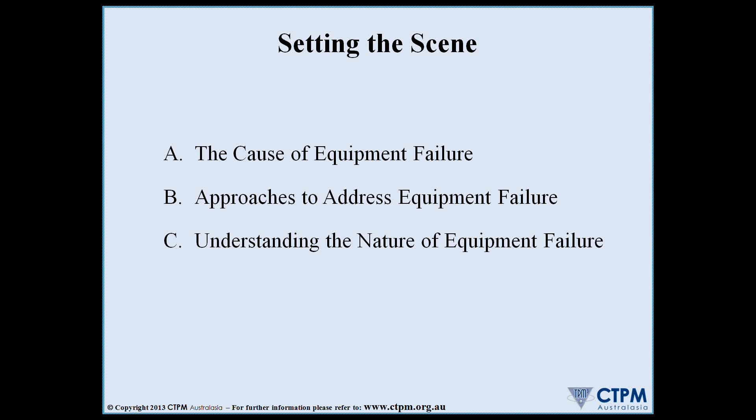Now to set the scene, I thought I'd just talk about three brief topics about equipment failure: the cause of equipment failure, approaches to address equipment failure, and understanding the nature of equipment failure. Because if we don't understand equipment failure, it is very hard for us to really get our head around how do we get our equipment to run perfectly.

So the first one is the causes of equipment failure. We've created this slide to help people understand that when something fails, and we're talking about your machinery in the plant, which often entails a lot of mechanical type componentry, often equipment doesn't just stop. There's often some signs beforehand.

We often see in plants where there is poor performance. In other words, the equipment is not running at the correct speed, or the equipment is not producing the product to the right tolerance. Now often before that starts to happen, there'll be further signs. Things like getting vibration in the equipment, noise, heat or fumes.

For example, we might put a pump into our plant. We expect the pump to run for, say, 5 years. After 2 years, the seals might start leaking and the pump may not be performing to requirements. Now, that's an example of early or accelerated deterioration. And then the next question we ask is, why does early and accelerated deterioration occur?

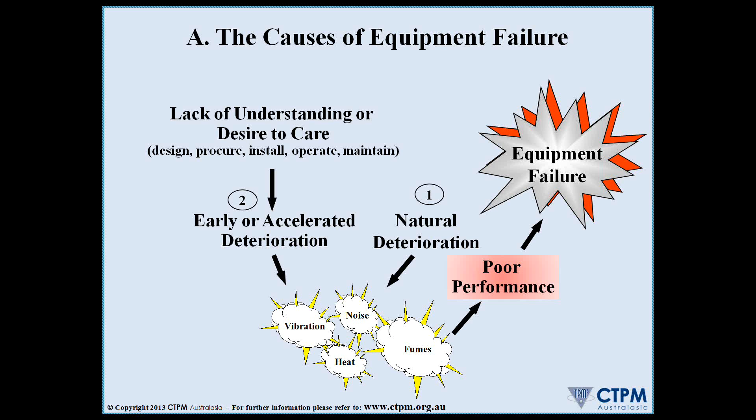Now, we have a slight challenge on my hands. Sorry about that, the screen decided to freeze up. Okay, let's move on to the next slide.

If we don't do anything about it, the contaminant could get into the bearing. It could be a damaged grease line, where if we don't do something about it, grease will stop moving into our bearing and the bearing could go into accelerated deterioration. It could be nuts and bolts coming loose. So that's the indicator.

So if we expand our slide and look at how we approach equipment failures, the first one is reactive. People go out there when it fails, get out there very quickly, do a great job, and get it all fixed up. That could be when the equipment breaks down, or when the equipment starts performing poorly.

The other approach is called predictive maintenance. This is where we go out and use preventive and predictive techniques, inspections. We inspect the equipment, and if we see it's worn or running hot, for example, we'll organise to replace it before it fails. It could also involve a lot of condition monitoring. So it's trying to find the problem after the accelerated deterioration has occurred and then fixing it before we get to the poor performance area.

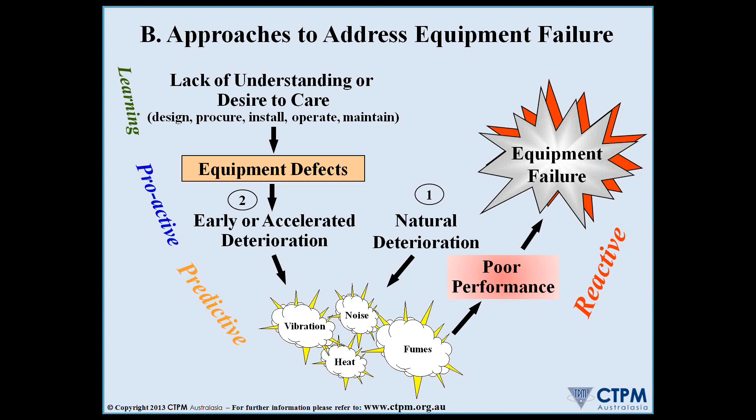So again, just a quick poll. What does your company do? What's your site do? What's their focus in relation to those four approaches? So at your site, what is the main approach to address equipment failures? Is it reactive, or do you put your energies into being predictive? Is your main focus proactive, going out there and getting, some people call it TPM, total productive maintenance, operators engaged to find all the defects?

Or you're trying to create a learning organisation where you're putting a lot of effort into the development of skills of your operators? Now, in most cases, people are doing all of those four things, but there's often a dominant one you can tell when you go into a site where most of the energy is going.

Our poll is progressing, and we are getting some interesting results coming up. Again, this just involves your best estimate of what you think is happening out there, and what we're trying to do is to give you some feedback as to where everyone is up to out there in the group. So the poll is getting close to being closed. And at the moment, yes, we've closed the poll.

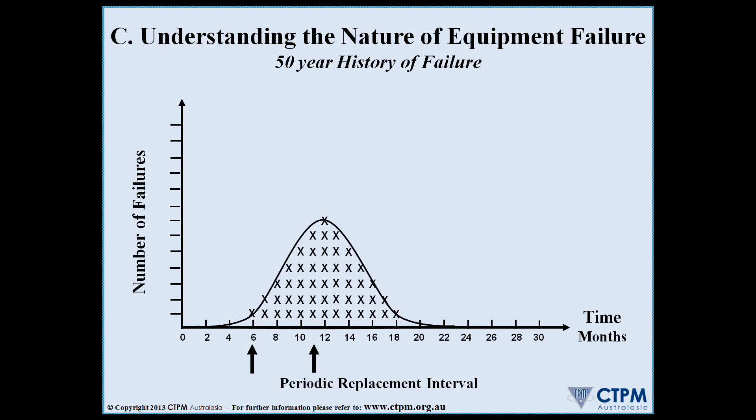And that was really the focus of these studies by DuPont and Alcoa, etc. How do we understand what's causing this variation? And I'm sure you could all come up with a great list of things that cause variation in component life at your site. What they discovered was that there's 3 dominant factors that made up about 80% of that time. And those 3 dominant factors were things coming loose, contamination getting into equipment, and lubrication not being perfect.

Now that frees up time for your maintenance resources, it stabilizes your plant, and what it also allows you to do is once you get past this, I guess, reactive stage of responding to all these things with their variation in component life, is to start looking at design weaknesses. Where are the weaknesses in our plant?

Again, use a car example. I remember an old car I had many years ago. We had a distributor with a set of points in it that would run spark up to the spark plugs to run the engine.

Now, what we found is the points used to wear quite often, and you'd have to re-file them, and that would put the timing out, so you'd have to continually adjust the timing on the car. Quite a heavy maintenance activity. This day and age, they've identified that design weakness and they've gone and replaced it with electronic ignition, so you now have a little black box that doesn't need any maintenance and it lasts for a hell of a long time before it needs replacement. So that's what we call design weaknesses.

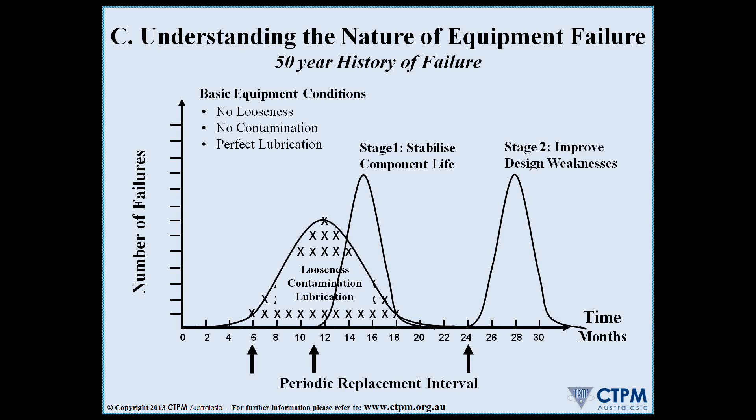So again, if we can develop their skills to understand the functioning of equipment, they can help identify these design weaknesses. And the end result is we substantially save money. And again, at least 50% reduction in our maintenance materials costs. So that's a bit of background. Let's get on to what we want to talk about.

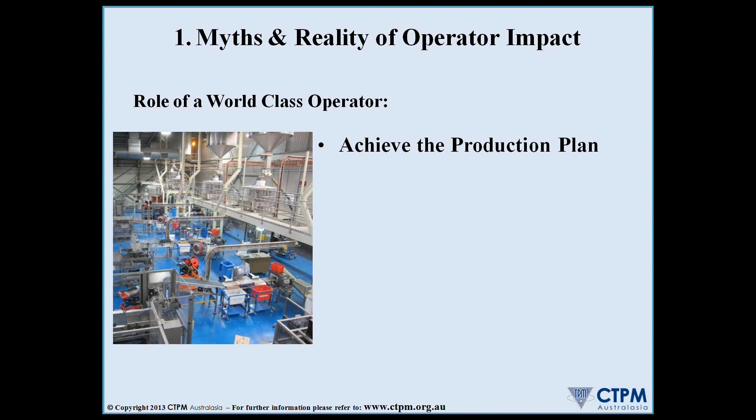Operator impact. Do operators have an impact on equipment performance? Well, let's look at the role of the operator. We want them to achieve the production plan, obviously. Now, in this day and age, obviously they have to be also very good at frontline safety and environment. They're the front line. If there's any hazards out there, we want them to respond straight away, whether it be a hazard to safety or a hazard to the environment. And in fact, most best practice companies now have their operators involved in checking on the behaviours of their colleagues to make sure that everyone's got good safety and environmental behaviours.

Frontline quality, we expect our operators in this day and age to pick up on quality problems at the earliest possible time. If we want perfect equipment and perfect performance out of our equipment, we need to make sure our quality is right. And that quality is not just what we make, but the materials we're using to make it, what we call zero defects accepted. Don't accept bad packaging material, don't accept bad raw material. Pick it up before we start processing it is very, very important. Obviously, processing it correctly is very important, and thirdly, making sure what we do finish up with is correct.

Energy management is becoming very, very important, so being able to pick up on any energy losses at the earliest point is a very important role. And then comes frontline equipment care. That's what we've been talking about. So you've got all these other things we want operators to do, but then we want them to take care of the equipment. And finally, formal ongoing improvement. We want them to be involved in improvement activities as well.

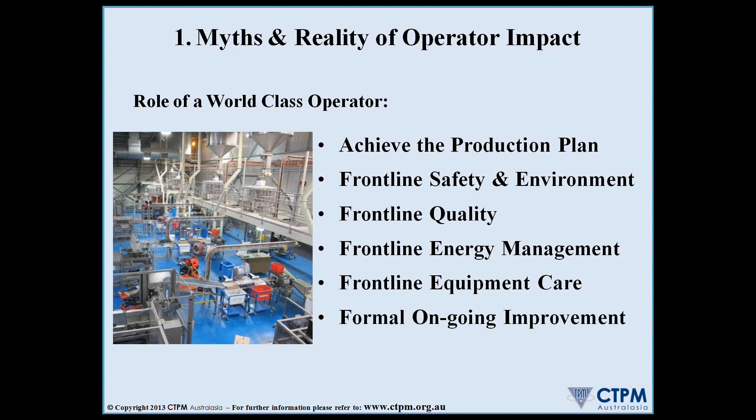So if our operators are capable of doing all that and we have trained and developed them, we have a hope of getting perfect equipment performance. If we don't develop our operators and just bring them in, give them a few standard operating procedures and tell them to go to it, I assure you your equipment will not perform very well and you'll have very high costs.

The other myth is maintenance. What about maintenance impact on all this? A lot of organisations you go to, they think, well, you operate, maintenance maintain, you operate, you fix, etc. We've found the whole thing is a very integrated activity these days if we want to get up to a learning and proactive environment. Obviously, the operators have to do the frontline equipment care. They're the ones out there with the equipment to find the defects at the earliest possible time. Maintenance still need to do their repairs, they need to do their preventive predictive maintenance, monitor the equipment, etc. And most importantly, the strategic maintenance, design out the problems and standardise.

By standardising, we mean we want to teach operators about equipment care, about lubrication, about components. If we can standardise a plant, it becomes so much easier for them to learn and therefore be more effective in taking care of the equipment and identifying problems at the earliest possible time so maintenance can get out there and do a good job.

So maintenance's role in all this is not just to go out there and look after the equipment, but to learn to become great teachers at teaching operators how to take care of the equipment.

And the third myth or third item we want to talk about is planning and scheduling. You can go out there and train all the operators in how to take care of the equipment and you can have brilliant maintenance people. But if you have a production plan that gets swapped and changed all the time, you can't have regular activity to learn how to care for the equipment and do the regular maintenance. And often we want to get to what we call synchronous maintenance, where we're bringing operators and maintenance working together in synchronous fashion to get the best performance out of the equipment.

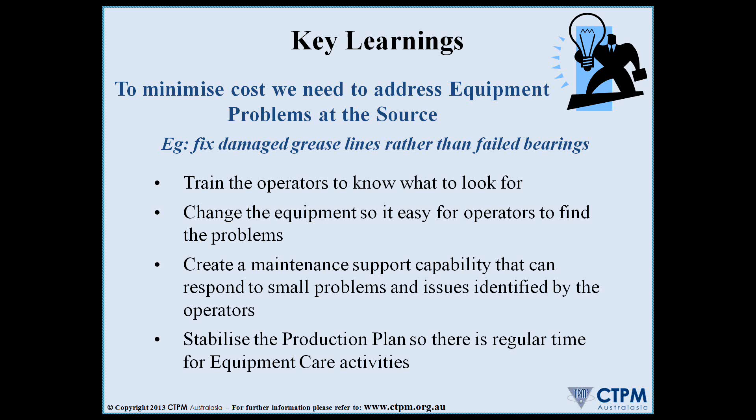And we need to stabilise our production plan so there's regular time for equipment care activities, so we can synchronise our maintenance activities with the operator care activities, so we can minimise our planned maintenance downtime and have it in small doses. Instead of having a shutdown once a month, 2 hours every week doing our preventive and predictive maintenance and our equipment care activities.

So going forward, how do we do all this? Our learning has been we need to get the decision makers and key employees on the same page through education and training. So everyone needs to understand some of these issues with getting equipment running perfectly. We always suggest that you set up a site leadership team to develop an agreed way forward, and we use 12 to 14 week cycles of ongoing improvement. It is better to do a small bit of training every week and have a set program time.

If you go on the web and look for a diet program or a training program, you'll often see it's all based around 12 weeks because that's the physiology of human beings. We like 12-week programs, and we can put our head around them and we can get very good results.

So we start with a few cross-functional teams in significant pilot areas to understand and address equipment and process losses. Once gains are achieved, we introduce production area-based teams to sort out their work area, then care for their equipment. So we want them to focus on defects, then contamination, then lubrication, then functioning of equipment. And then we cascade this across the site at a rate that supports your business plan.

In other words, how urgently do we need to get these cost savings? How urgently do we need to get our equipment working perfectly? How urgently do we need to develop our people? And our constraints are often our facilitation resources and our support constraints, the ability to go and fix up things. So we need to address those issues as well.

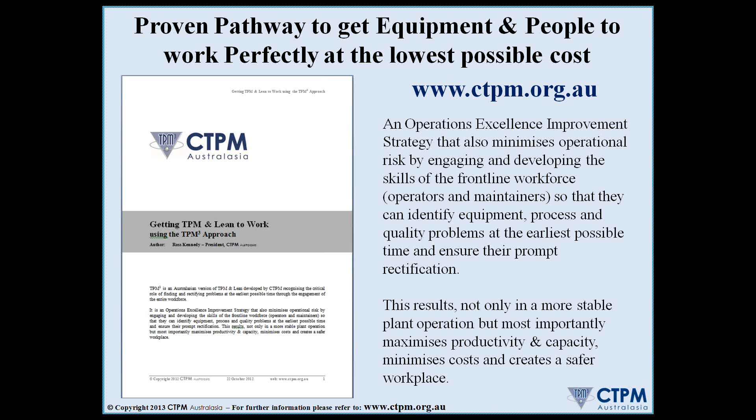While we're waiting, Ross, I've got a question for you. How do you engage your operators to do all this? It sounds like a lot more work for them. I can just see the faces now when you actually tell them about it. So how do you actually engage them?

Good question there, Samantha. Yeah, what we find is when we look at operators and they think, well, I just come to work and I'm employed to operate the machine, and they want me to go and find defects and whatever. I guess the thing we've learned is that the Australasian workforce, Australia, New Zealand, one of its unique characteristics is it's very much driven by what's in it for me. Every time management try to introduce something new, it's all about what's in it for me. And the thing we've discovered is that if we go and ask our workforce the question,

do you ever get frustrated because the equipment is not working perfectly? Most people will nod their head and say yes, whether that be the operator, the maintainer, the planner, or the supervisor. So going into the workplace and saying, hey, we want to start some initiative to get the equipment to work perfectly, we find gets very quick buy-in from the operators and the maintainers.